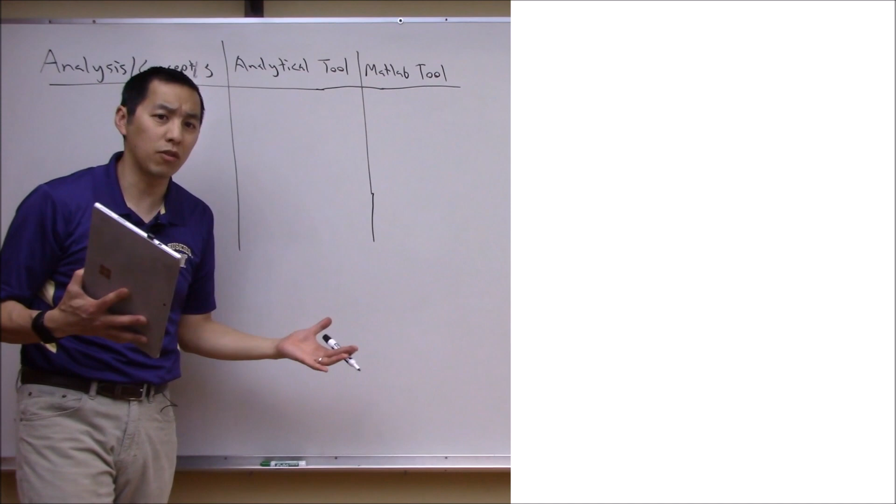So let's start off with maybe the easiest one. If you remember, we had a lot of discussion here on performance metrics like percent overshoot, settling time, rise time, etc. And we saw that the analytical tool that helps us understand these concepts is basically looking at things like the step response. We also saw that you could understand the percent overshoot and settling time for some systems, namely second order systems or second order dominant systems, by looking at regions of the complex plane. Basically, where do the poles land?

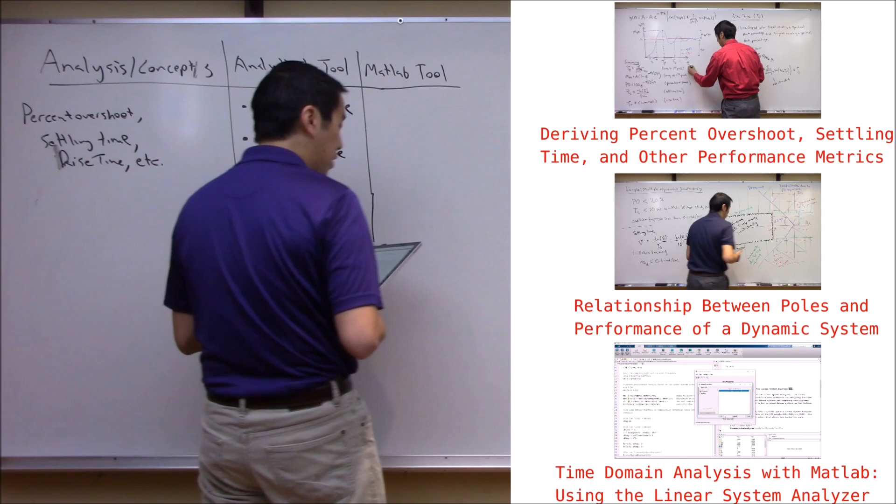And again, over here on the side are 3 of the YouTube videos that discuss these concepts and tools. And we saw that MATLAB actually provides different sets of tools to do this type of analysis. So there's things like the step function, the LSIM function. There's actually the linear system analyzer, which is another tool that allows us to do this. And many more here. I just wanted to list a few of these, okay?

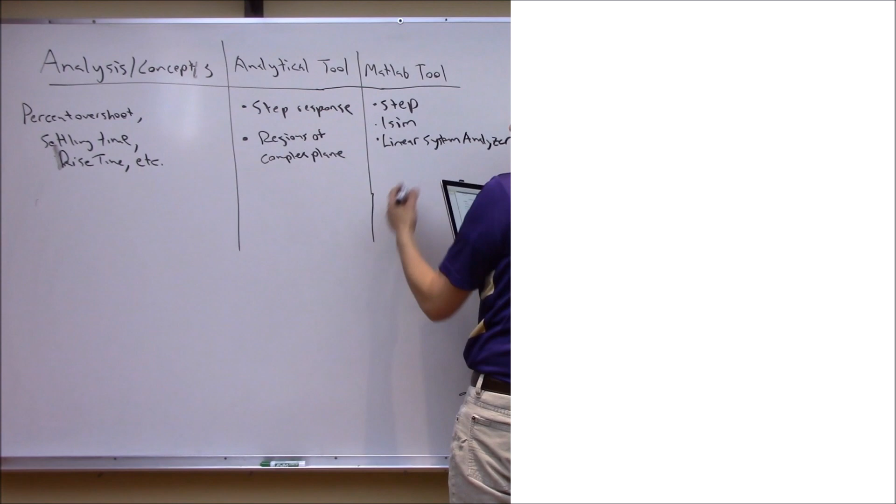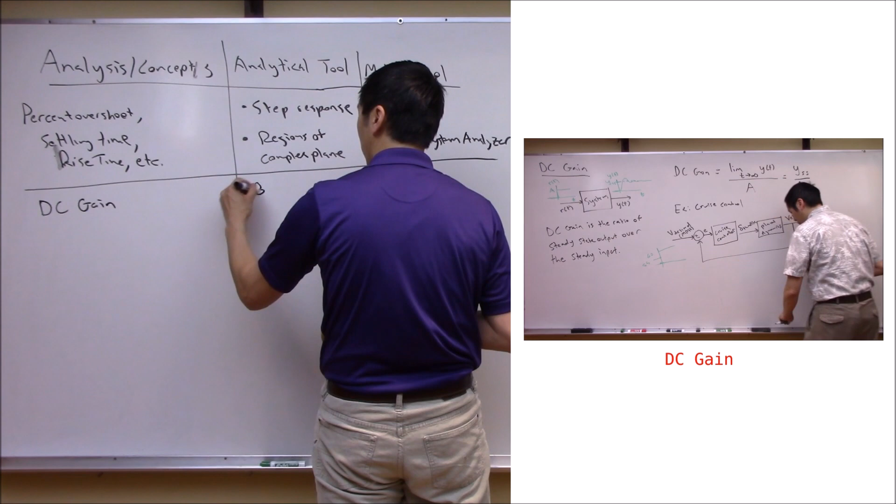So this was one concept that we saw was critical for designing control systems. What else did we see? We had a discussion on DC gain, right? And we saw that if you want to understand the DC gain of the system, what you're really thinking about is looking at the Bode plot, specifically at low frequencies. MATLAB has a nice tool for this. It has a Bode function which will allow us to do that.

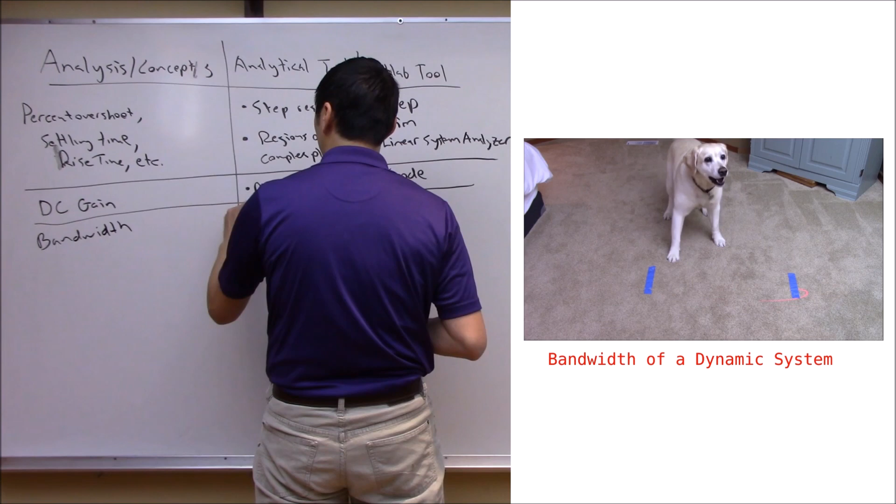Okay, what other types of concepts did we cover? We also looked at system bandwidth. And we saw that if you want to look at bandwidth, again, you're looking at a Bode plot, but you're looking at a Bode plot of the closed loop system. And again, the thing that's relevant here is the Bode function.

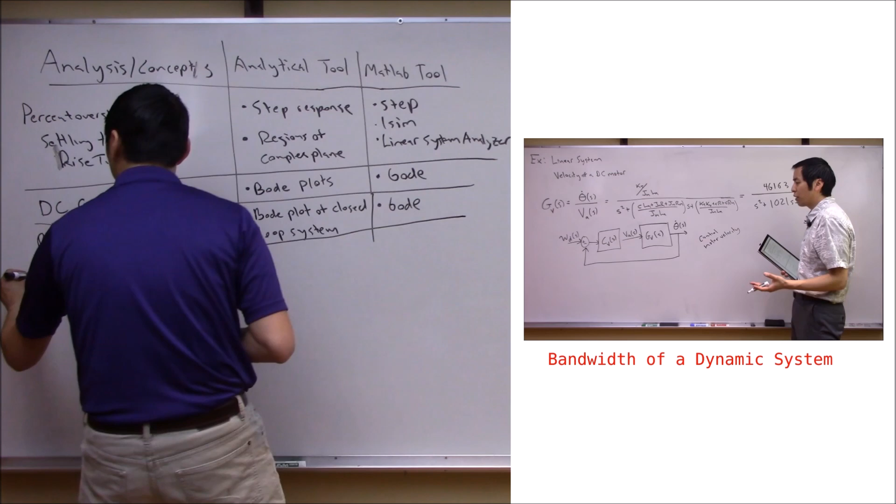While we're still talking about Bode plots, remember we also had a discussion on gain and phase margin. We saw that the idea was, again, you still look at a Bode plot, but now you're looking at a Bode plot of the loop transfer function, not the closed loop system, right? And again, you could use Bode, or MATLAB also has a margin tool for this. As I discuss all these, I'm going to flash up the relevant videos over here on the other side of the board. I'll leave URLs to all of these videos in the description of this video here.

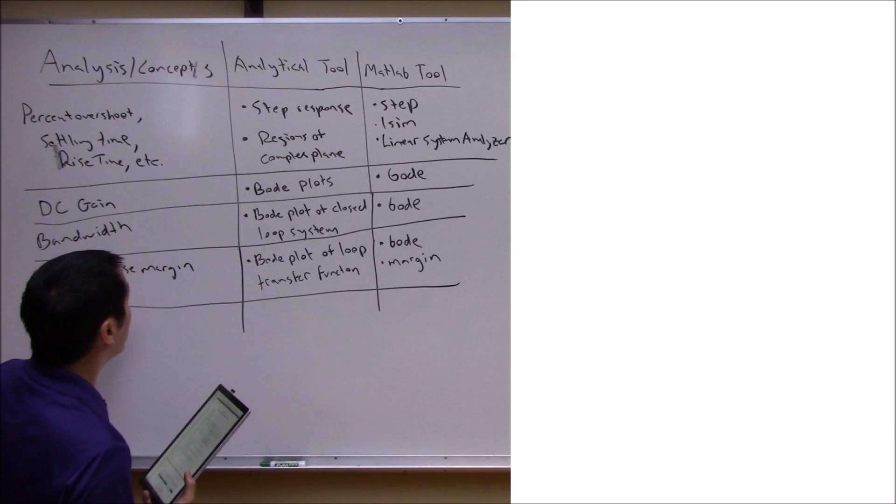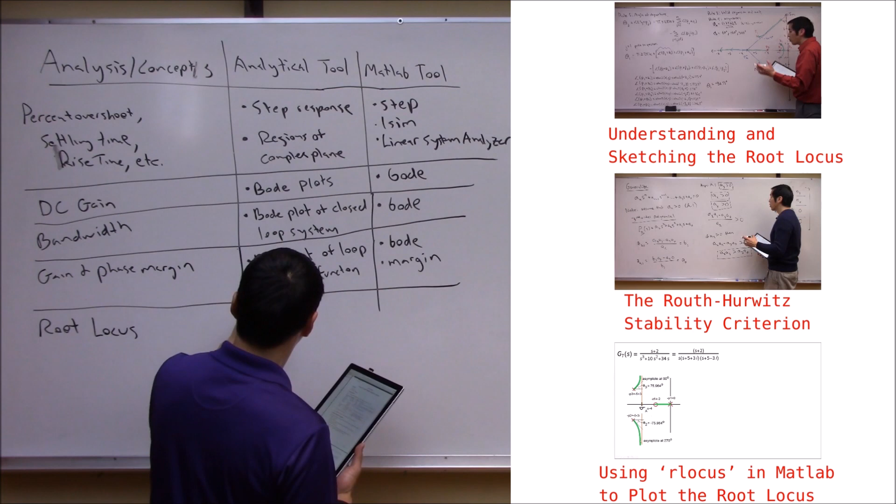What else did we talk about while we were designing controllers? Oh, how about root locus? That turned out to be a very critical concept. The ideas with root locus here were obviously you could plot the root locus - that's kind of self-explanatory. But there were other tools like Routh-Hurwitz, which also allowed us to help understand this concept a little better here. And again, MATLAB had tools for this, like rlocus.

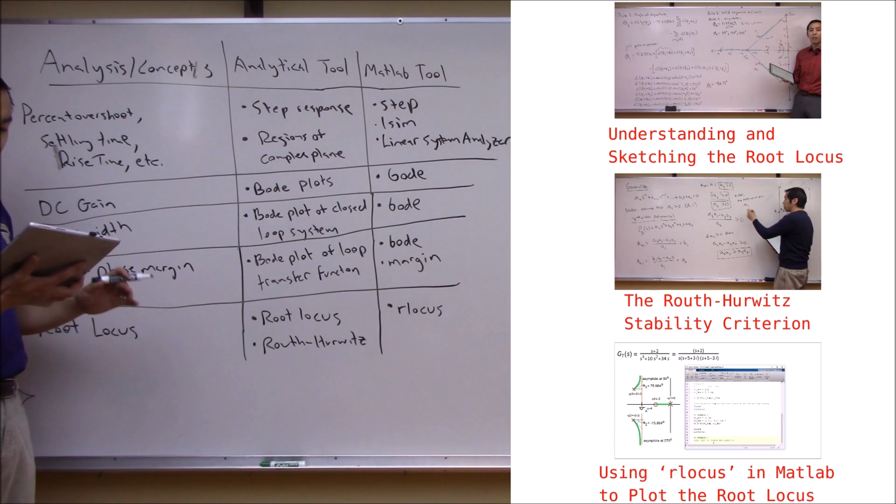So the reason I wanted to put up this list here is because we've had a lot of good discussions so far talking about all of these different topics, and I want to make sure that you've watched all these and understand these concepts because we're going to make use of them here, and it really helps understand that if you look at this, it's a pretty healthy list of topics, but they require a somewhat scattered set of tools to deal with, right?

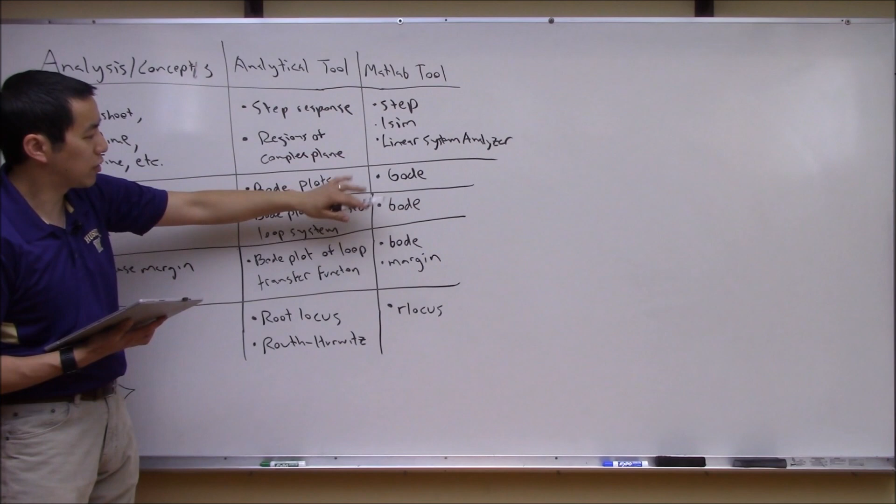You've got the linear system analyzer, you've got margin and Bode, and you have to do all these different types of analysis to see the whole picture, right? Because we saw all of these different concepts feed into designing a linear control system. So I bet you're thinking right now and wishing, gosh, wouldn't it be swell if there was just one tool that would allow me to do all of this analysis together at once?

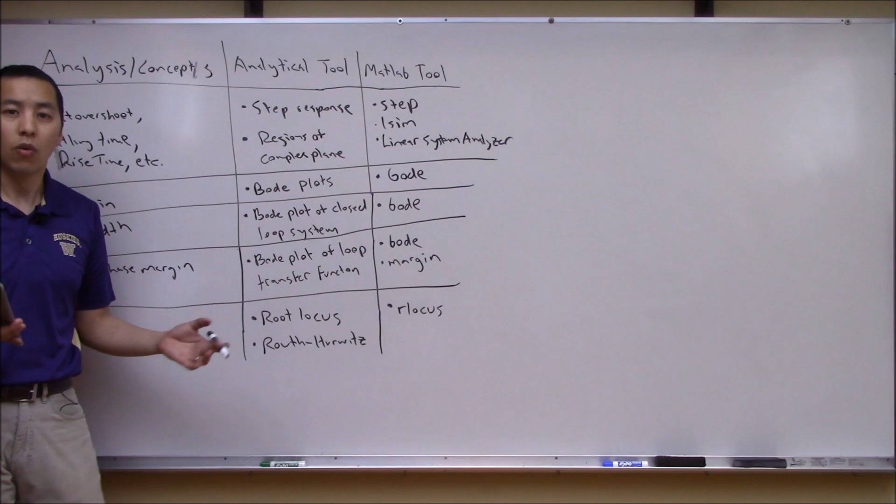Well, I hope you live in Agrabah with your pet monkey Abu, because today I'm going to be your genie and make all of your dreams come true.

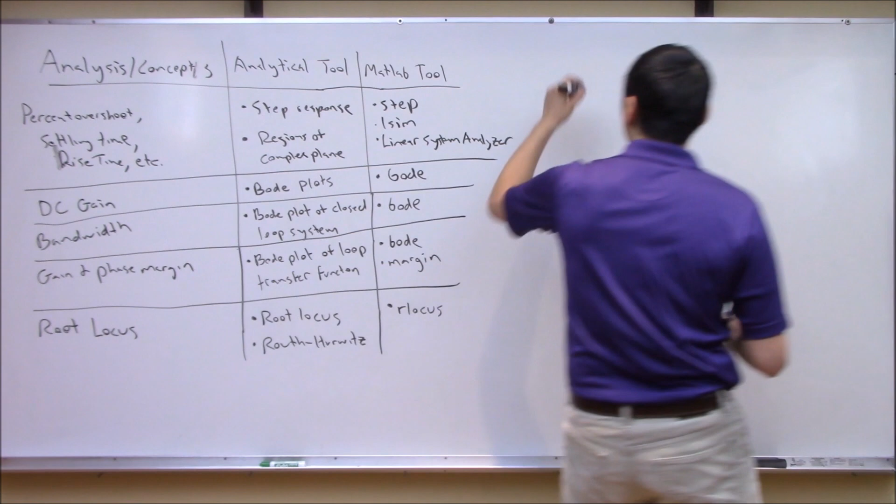We are going to introduce what's called the Control System Designer, which is a tool in MATLAB that's going to allow us to do all of these tasks and more. So it's going to allow us to do all kinds of things.

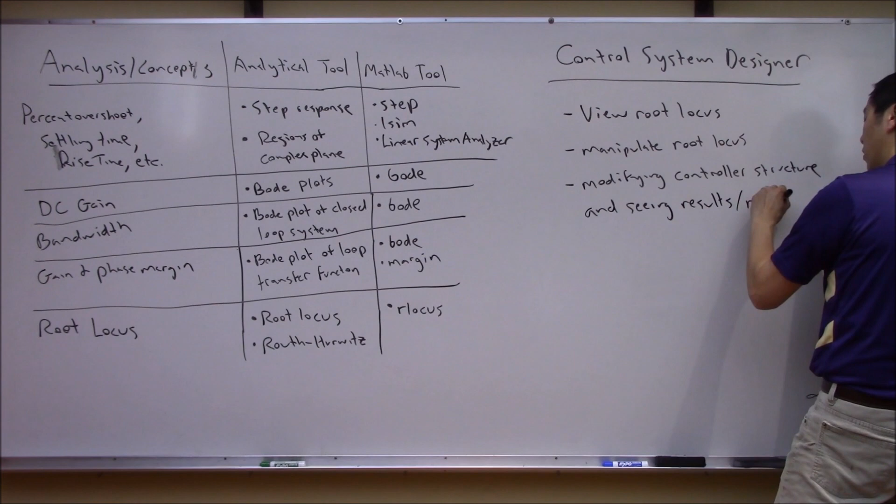For example, it's going to allow us to view the root locus. It's going to allow us to manipulate the root locus. It's going to allow us to think about modifying a controller structure in real time, and seeing the results and ramifications in real time.

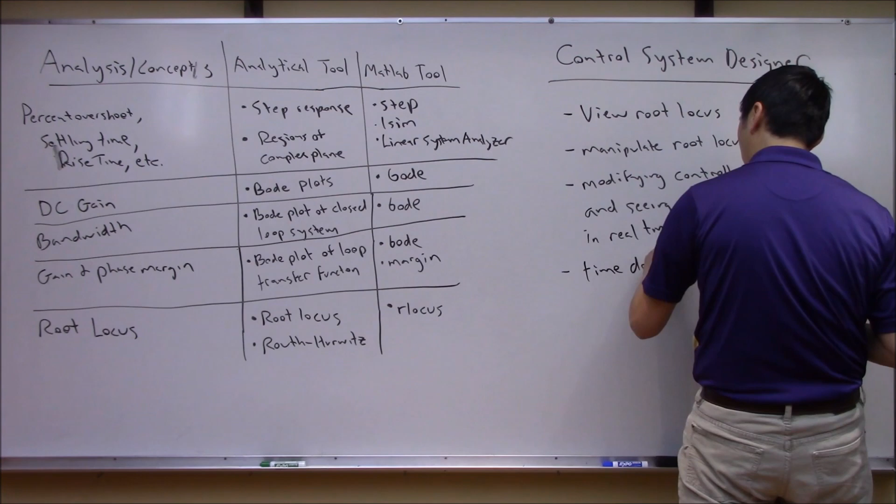It's going to allow us to look at the time domain response of the system. It's going to allow us to look at the frequency domain response of the system. So it's all of these things put together in one tool that, if we understand how to use this effectively, is going to really help our control system design workflows.

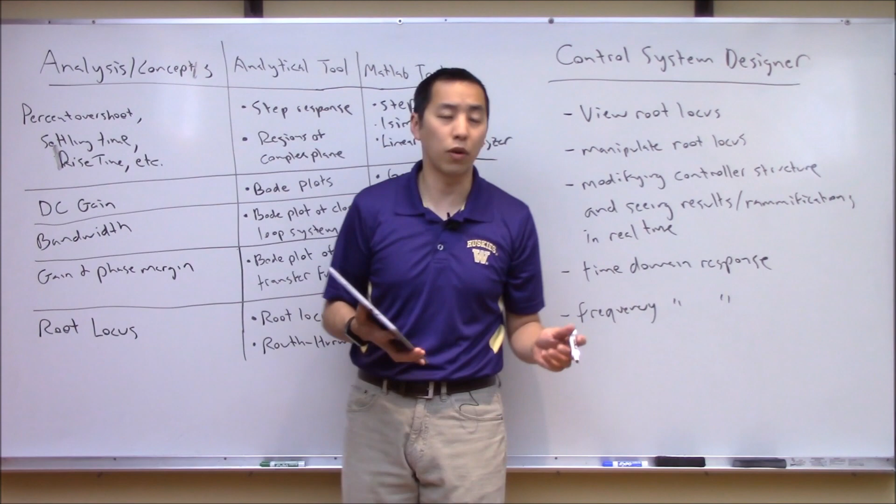So isn't this great? And you know what? You still have 2 wishes left. So if you'll chase them anywhere and you've got time to spare, then let me share this whole new world with you.

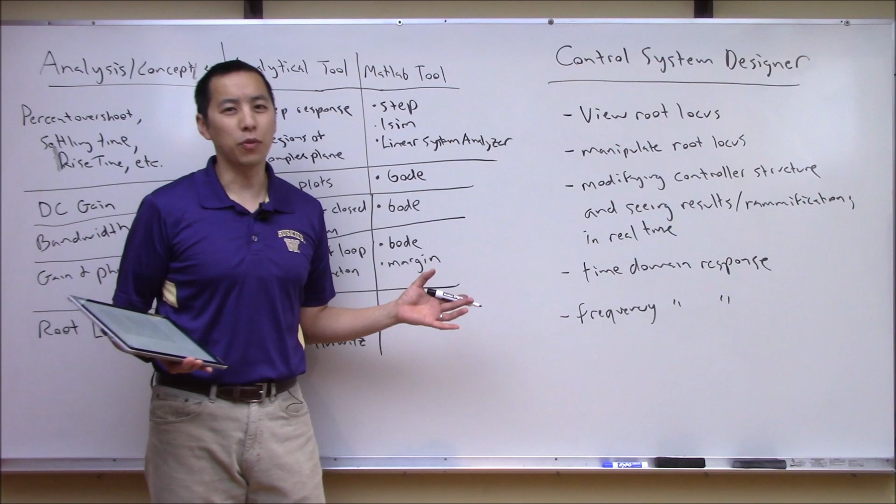Okay, so before we dive into MATLAB, I want to talk a little bit about just the workflow for using the Control System Designer. We're going to see that it's a little bit different, so it might behoove us to quickly discuss a relevant way to use this effectively.

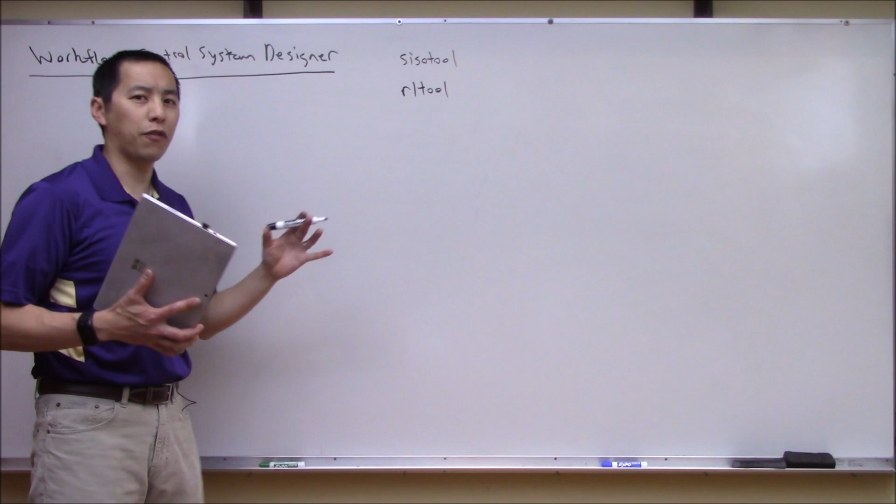Just as a quick note, the Control System Designer, you may have heard this by other monikers in the past. I think when I first learned about it, I learned about it as a SISO tool. So let's just make a quick note that it used to be called SISO. There was a thing called SISO tool. There was also a thing called RL tool. And I think these got renamed back in like MATLAB R2015A or something like that. And everything now that's newer is called the Control System Designer. So just FYI, if you hear people talking about SISO tool or RL tool, that's basically the same thing.

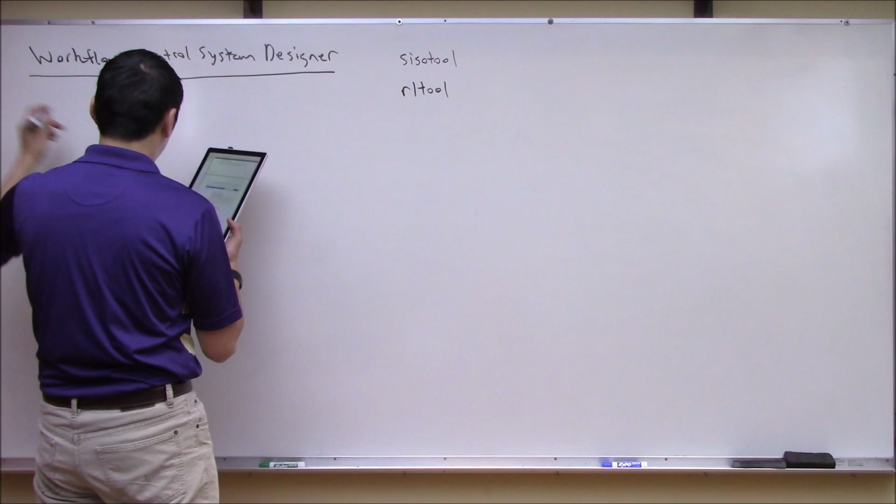So with that being said, the workflow for using the Control System Designer, I think of it as a 7-step process. So the first thing that you're going to do here is you're going to generate a dynamic model of your system.

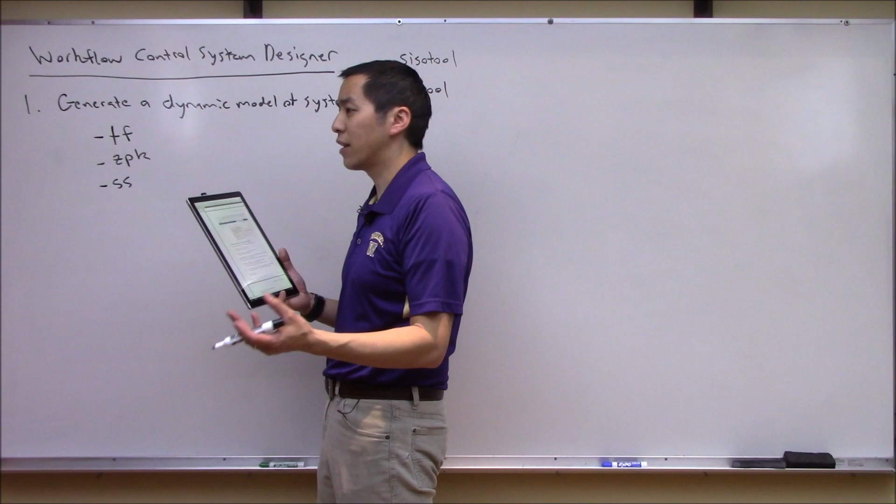Usually the plant. So things that are helpful is you could use things like the TF function, the ZPK function, etc., the state space function. All those things in MATLAB could help you generate basically a dynamic system model of your plant that we can then load into the Control System Designer.

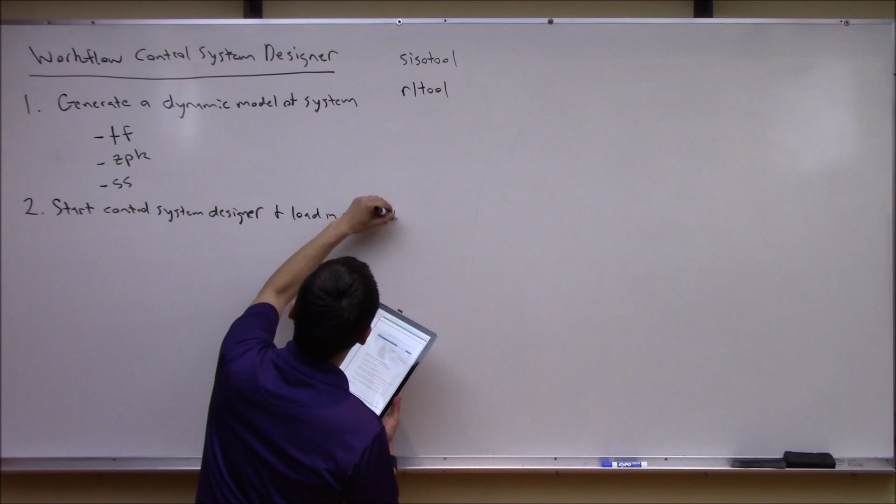So that's the second step. Step 2 here is go ahead and start the Control System Designer, and load in the plant model, the thing that we developed in step 1. The helpful command here is obviously Control System Designer - this should be a capital S and a capital D and a lowercase c. Okay, so that will get the system started. We'll look at another way to get it started as well, and we'll also look at how to load in the plant.

But once you have this all set up, what's really nice about the Control System Designer is you can add design requirements. Okay, so these are things like percent overshoot, pole locations, frequency domain response, time domain response - all those different requirements can be captured and codified in one spot.

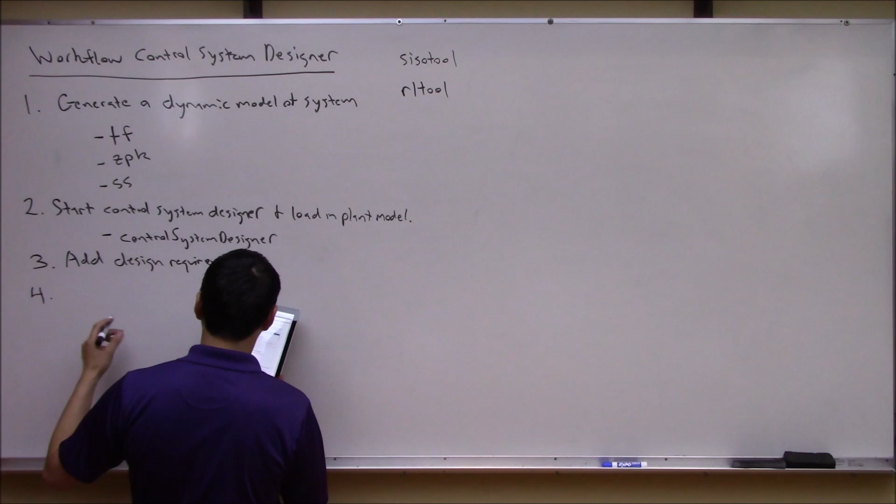Okay, the next few things - once you have that all set up, step 4 is now that you have your plant in there, you have your design requirements, you can basically go ahead and design your controller, or your compensator, however you want to look at it.

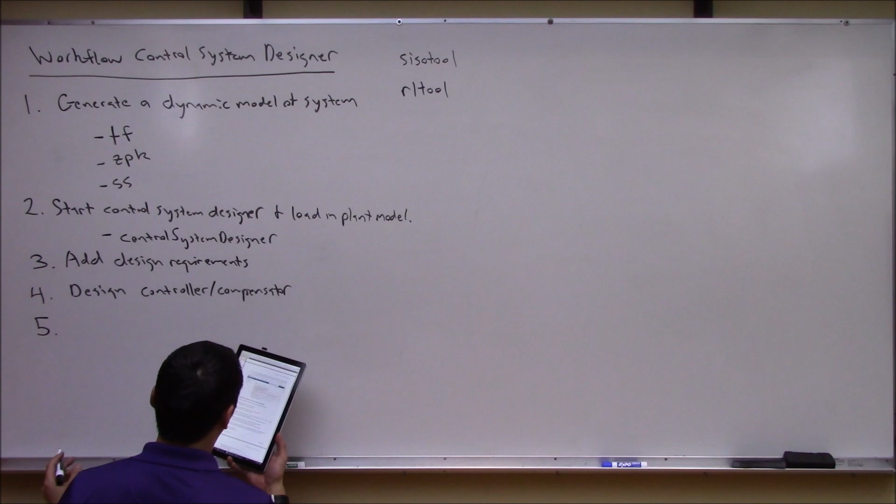Directly in the control system designer, we're going to take a look at how to do that. Once you're happy with your controller that you've designed, we're going to have to export that compensator back to the main MATLAB workspace. So step 5 is export your controller, or compensator, to the MATLAB workspace. We're going to see what this means in a little bit.

You might think everything is one giant workspace, but it's not really. Okay, then once you're done with that and you have it in the main MATLAB workspace, what I would do is save your controller and possibly save your session. Again, this will make a little bit more sense once we get into it. What is your session? So the relevant functions in MATLAB that are helpful here are, obviously, save.

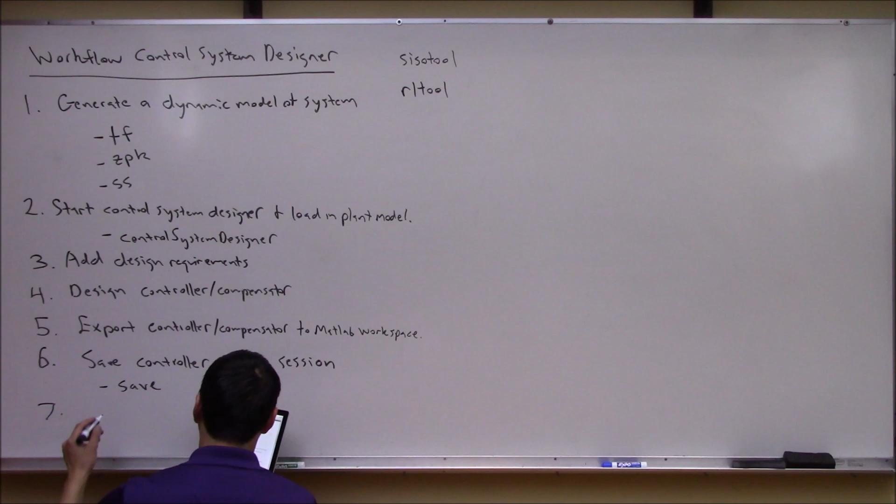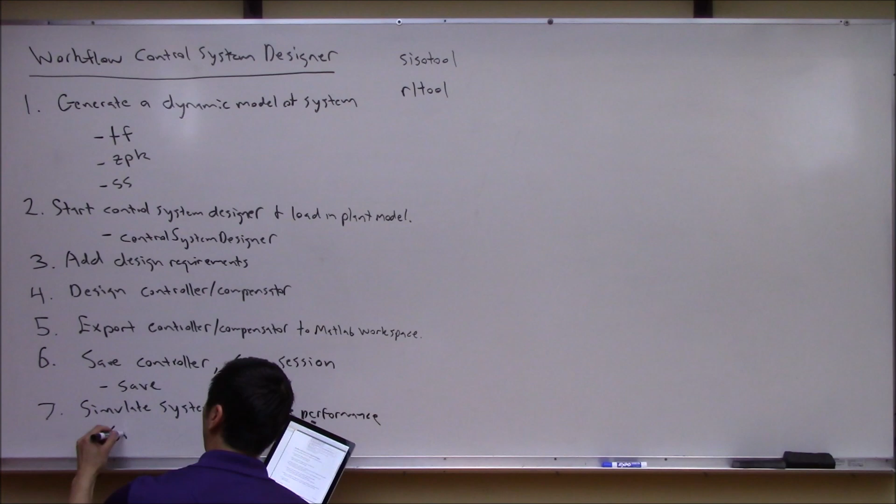And then the last thing that I would do, once you have all of this controller designed and saved, is go ahead and simulate my system to validate performance. In this case, I would basically think about building a Simulink model that represents this plant and this controller that I've designed, and make sure that it actually performs the way that you expect it to.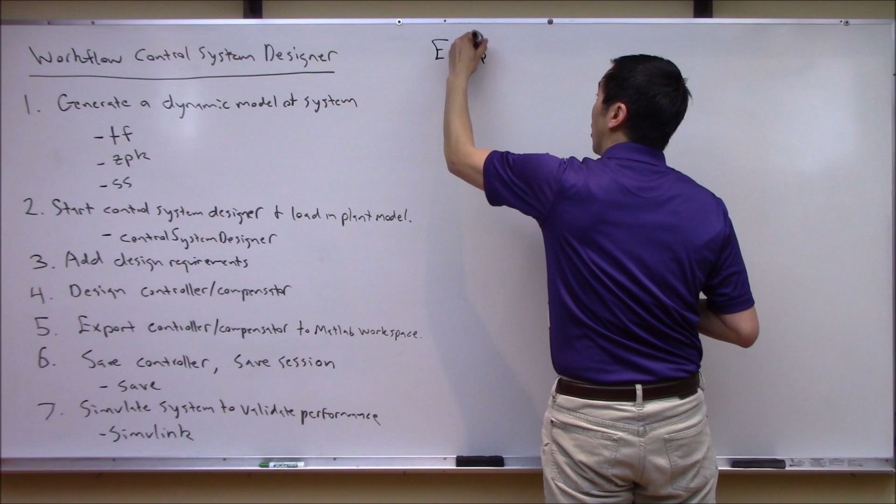Okay, so let's think about using an example. I always like concrete examples. So with this workflow in mind, let's think about an example that we can use and see if this control system designer will help us in this scenario.

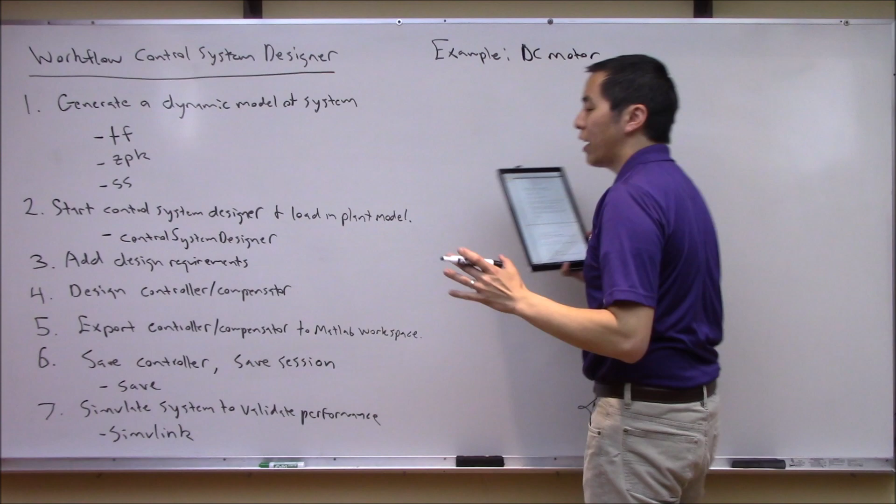So the scenario I want to look at here is our good old friend, the DC motor. If you haven't had a chance, we have a video talking about how to derive the transfer function, or a dynamic system model, for a DC motor. If you don't care about that and all you want to do is look at this as just some third order transfer function, that's great as well. But what I want to look at is how we can do DC motor position control.

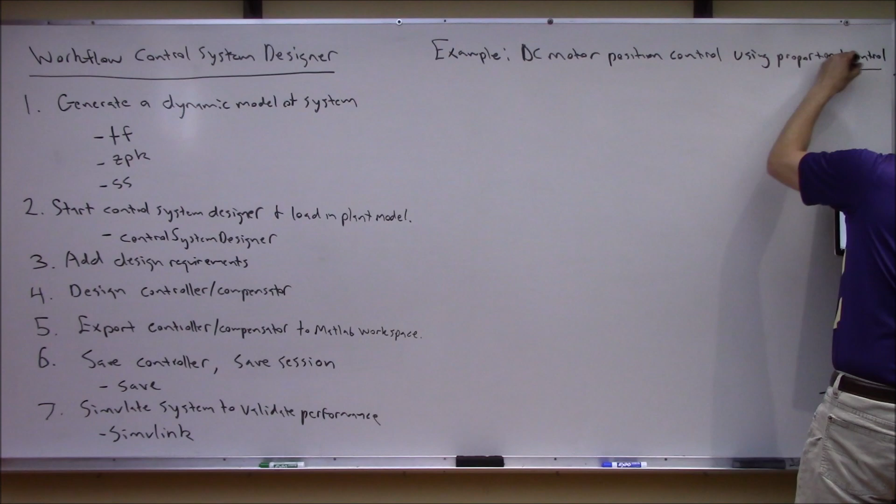And in this case, we are just going to be using proportional control. We're going to have videos later that look at more complicated control architectures, but let's keep it simple when we're just introducing this tool, okay?

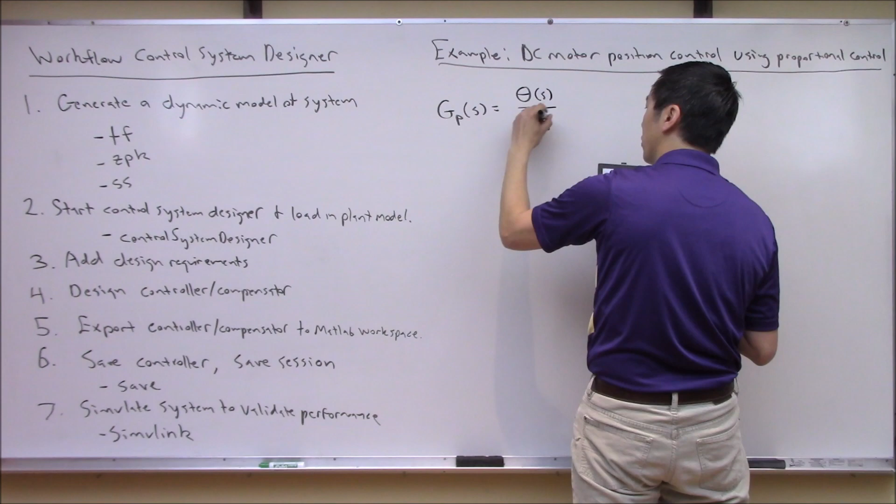So the way we want to think about this is, if you remember, the plant, let's call it GP of S, this is the motor position or the motor angle over the armature voltage, or voltage applied to the DC motor. We said that this transfer function, it's a bunch of constants, but at the end of the day when you plug in numbers, here's some transfer function. You could think about this as just a system that is dropped into your lap, right? Some other team in your job has gone ahead and said, here's the model of your plant, go ahead and build me a controller that will deal with it. So here's what it looks like: 46163 in the numerator, and in the denominator, S cubed plus 1021 S squared plus 4845 S. This is just your transfer function, okay?

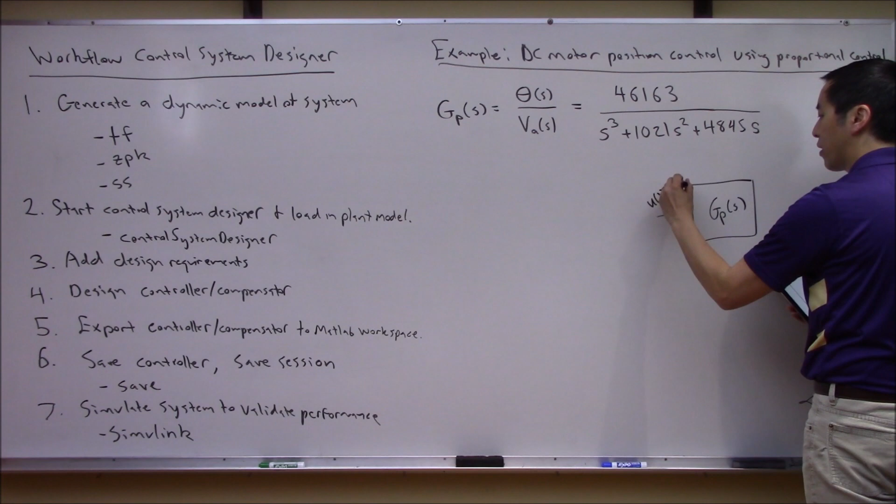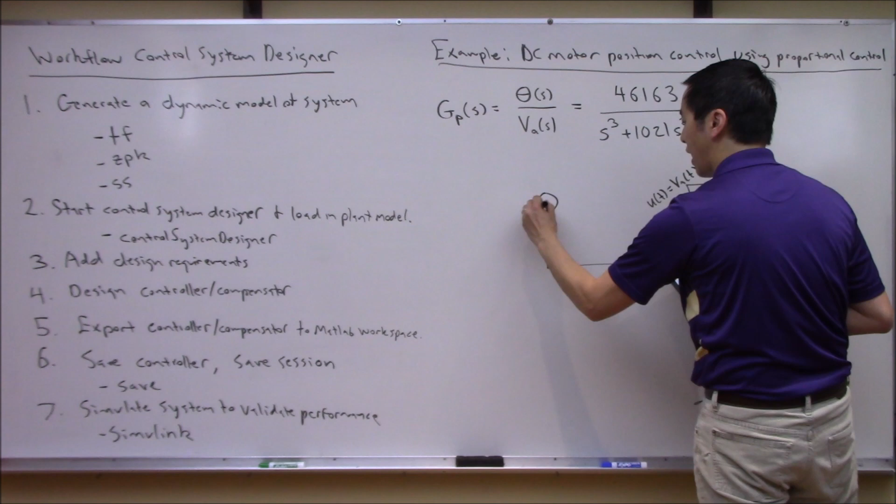So what we want to think about now is, okay, here's my system, GP of S, and you give it a control signal U, which is, in this case, the voltage to the motor, and it spits out the angle of the motor, of how far it's turned. What we want to think about now is using our specific classical control architecture, where all I want to do is design a controller C of S, where this C of S is just a gain K, a constant gain. We'll look at something more complicated a little bit later, but this is the game plan: find a value of K that will make this thing behave desirably. So we now need to think about what 'desirably' means.

Let's assume that maybe your manager drops some performance requirements onto your lap along with this system here. So let's talk about performance requirements.

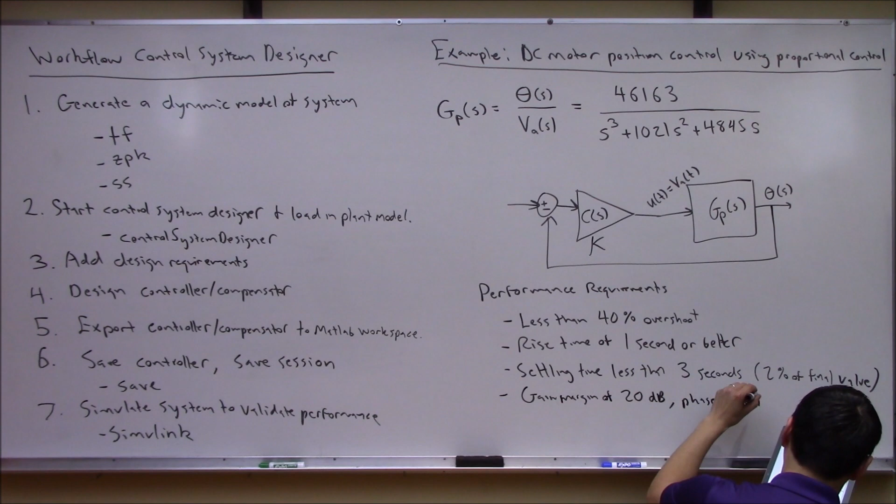Okay, so let's say they say you've got to have less than 40% overshoot, that's the maximum they'll tolerate. You have to have a rise time of 1 second or better. You need a settling time of less than 3 seconds, and this is to within 2% of final value—that's our band for how much we consider it to be settled. Okay, you need a gain margin of 20 dB or better, and a phase margin of 30 degrees or better.

And then finally, the system better have a bandwidth of greater than 5 radians per second.

At this point, hopefully it makes sense why I say you want to make sure you watch all of those previous videos, because if you did, all of these requirements should make sense to you. You should understand physically what the system has to do in order to meet all of these, or what it should behave like.

So our game plan now is to design a controller K that will simultaneously meet all of these requirements. What we saw earlier is, sure, you've got the tool set to do this right now by cobbling together different types of analysis, like loop transfer function Bode plots, closed loop transfer function Bode plots, root locus, pole locations, all of that kind of stuff. I'm sure you could do it, but I want to make the case that the control system designer is going to make this workflow a lot easier.

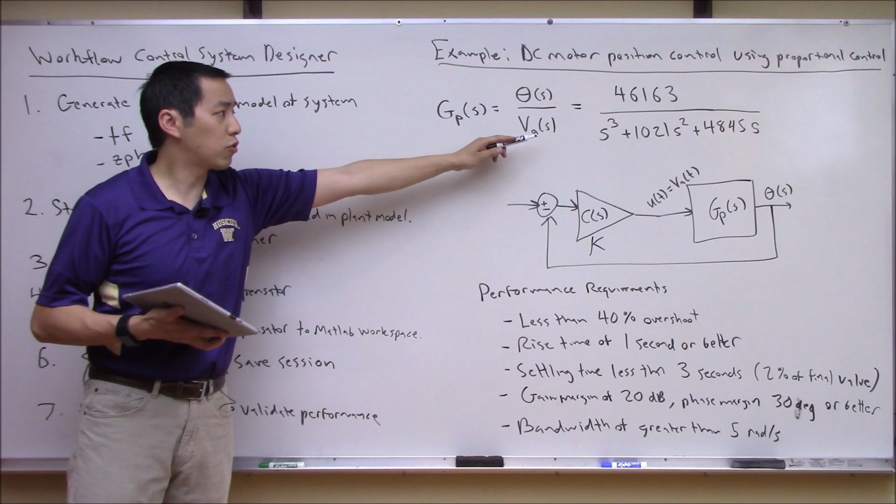So with that being said, let's jump over to MATLAB, get the control system designer fired up, build this transfer function, and walk through these 7 steps to see if we can use it to effectively and efficiently design that proportional controller K. So here were our 7 steps.

Let's start with step 1, which is generating a dynamic model of the plant. To do that, let's go over to MATLAB and start a new script.

I'm going to say we are using this to explore how to use the control system designer to create a proportional feedback

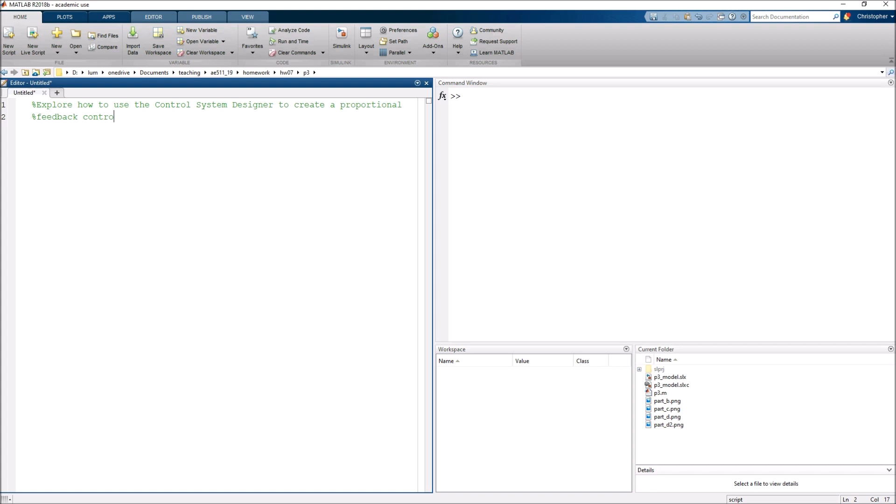controller. We'll start with our normal clear, CLC, close all, and maybe before we get started, let's go ahead and save this script.

So Control S to save, and I'm going to put this someplace. I have a folder already, and whatever you do, do not call this Control System Designer, because that's the name of a function we're going to use to start the designer. You can call it Control System Designer script or something like that if you really want to.

Now let's go ahead and start with step 1: generate plant model. We're going to do this the same way we did earlier.

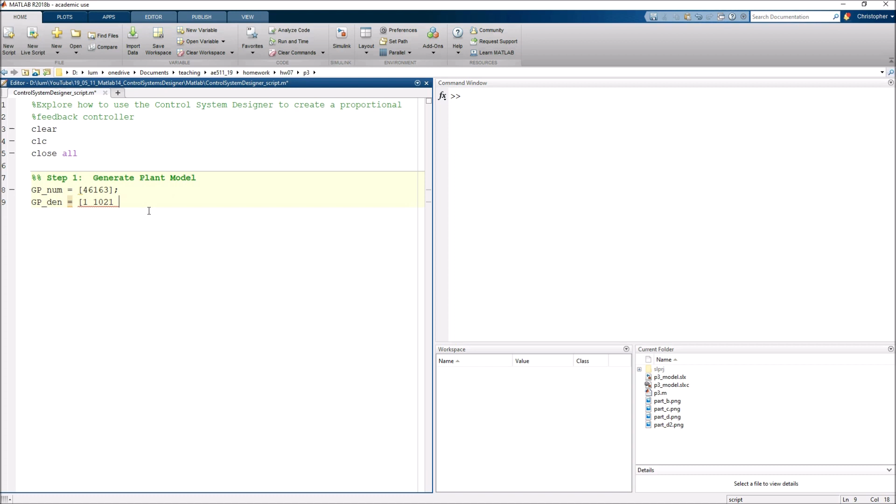We're just going to create a numerator coefficient vector for the numerator coefficients, and I should call that GP numerator. Then GP denominator is a vector of the coefficients of the denominator polynomial. So that was something like that.

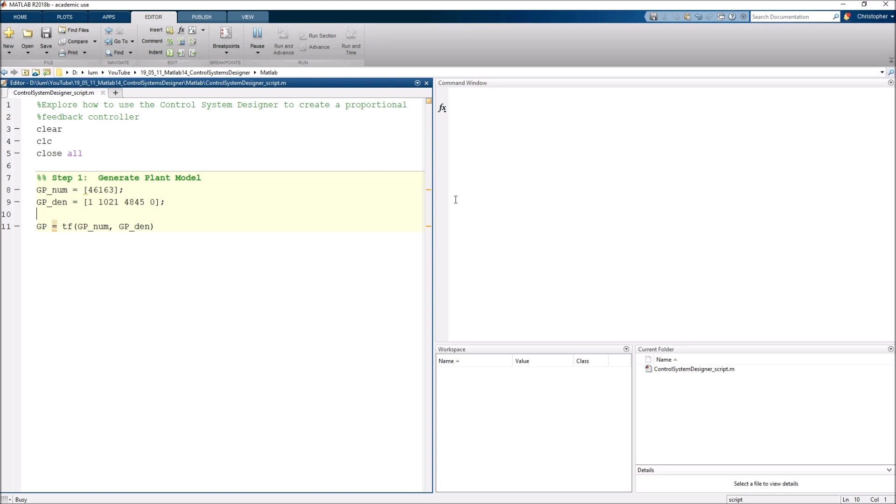And then the overall transfer function for our system is just going to be TF of num and den. So if we go ahead and run this, I'll change the folder to this current location, and here is our transfer function between the armature voltage and the position of the motor.

Okay, so next let's go on to step 2. Step 2 was we need to start the control system designer and then load in the plant model.

Hopping back to MATLAB, there's a couple of ways we can do this. Step 2, start the control system

designer. One of the ways you can do this is you come up here to the apps tab in your MATLAB window, and here are all these different apps. I'm going to hit this drop down, and I'm going to look for the control system design and analysis. Here's the one we're interested in, the control system designer. I can go ahead and star that because it's kind of helpful, so that will move it up to my favorites.

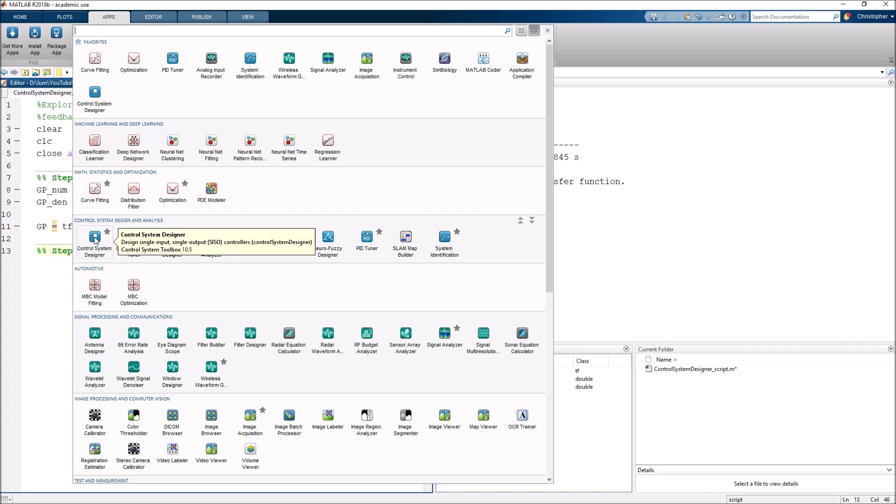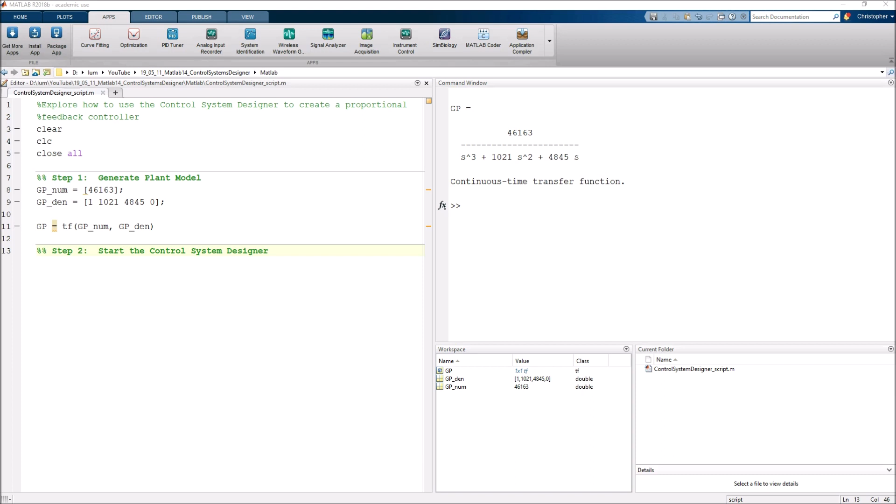But one way you can do this is you can just click on this icon, and what it will do is start what's called the Control System Designer. We'll give that a second to populate, and I'm going to show you a second way to get this as well. It pops up for me on a different window, so let me go ahead and drag it over here. It's still initializing, you're seeing it pop up a whole bunch of different plots. And here we go, this is the Control System Designer.

Let me close this real quick, and I'll look at a different way to open it and get to this exact same spot. So the other way you can do this, when you try to close this, you get this little save session notification. I'm going to hit no because I don't care about this for now. The other way you can do this is if you just go ahead and type help Control System Designer.

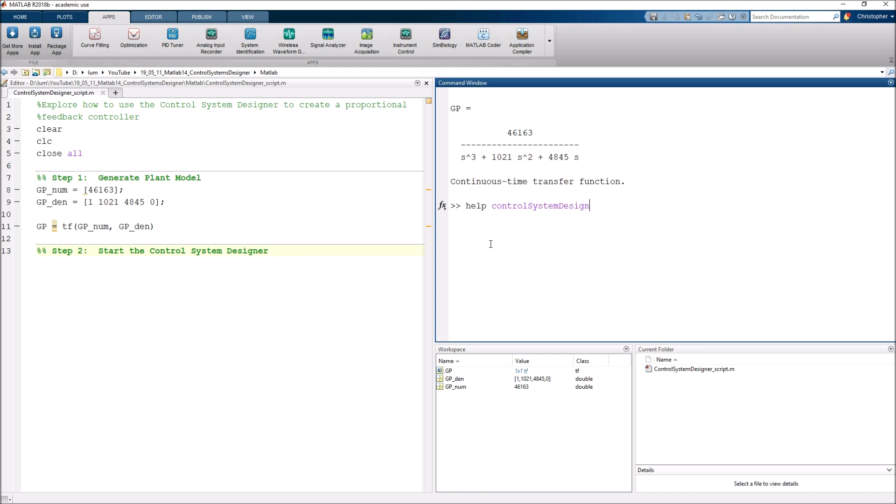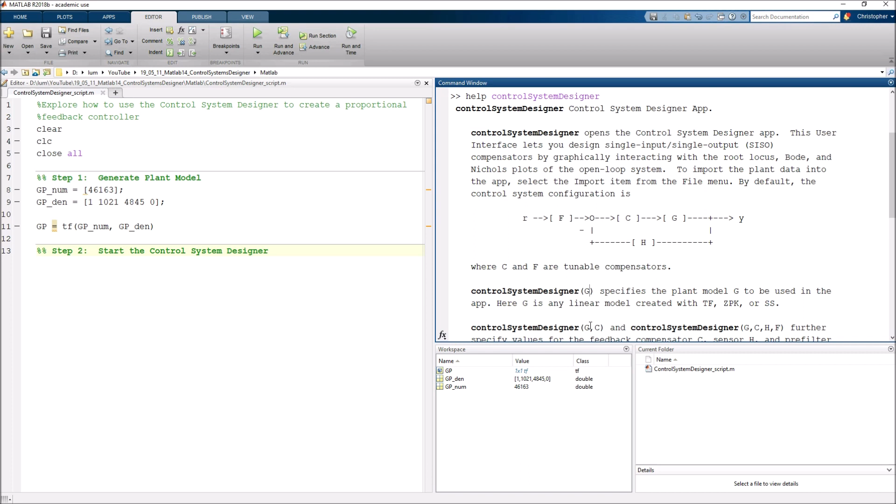You could call it like a function, and in fact you can call it like a function and pass in the plant model if you'd like. I'm not going to do that. Let's just go ahead and open the Control System Designer programmatically, without loading in the plant model, because I want to do this manually so we can get some experience.

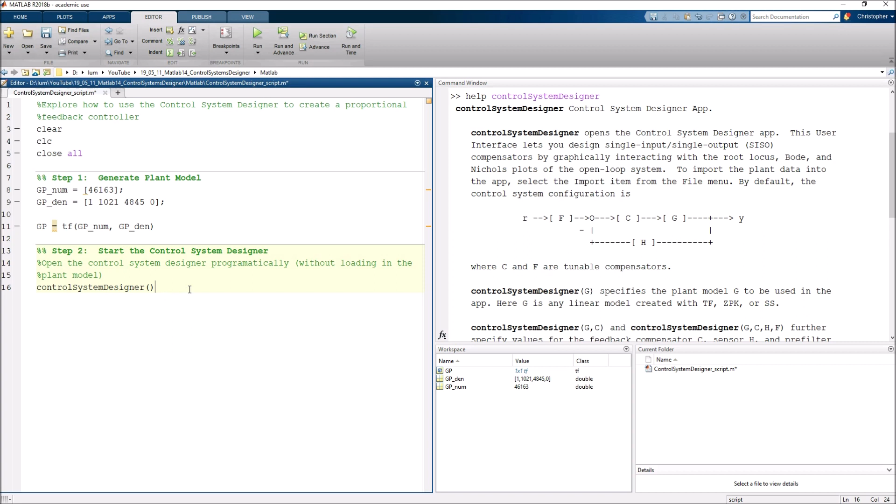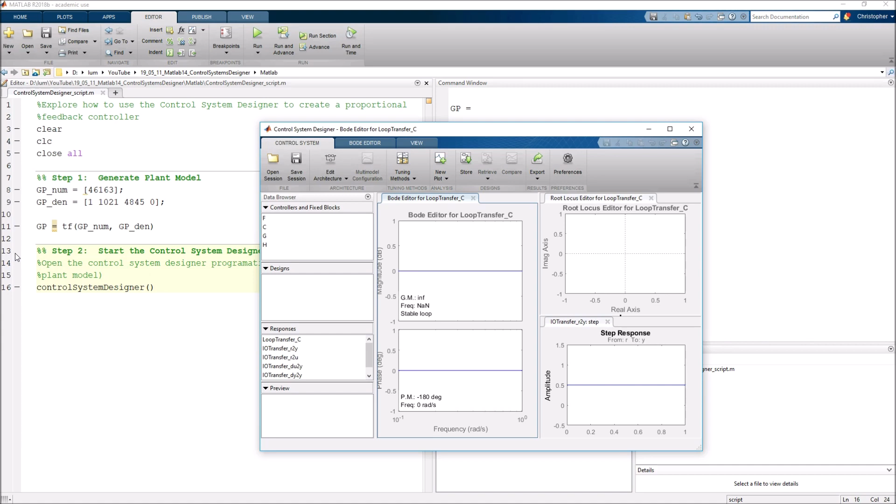So I'm going to say Control System Designer, like that. You can call it with empty parentheses if you want. Now if we run this, when we hit line 16, it's going to initialize the Control System Designer. So here it goes, it's pulling up. Let me go ahead and maximize this so we can get a better understanding of what's going on.

So the Control System Designer looks like a lot initially, and it really is. It has a lot of functions and features, but at its heart it's a root locus design tool that shows you the root locus of a given architecture of a system. It will also show you things like the step response of the system as well as frequency domain analysis. So the question that's probably on your head is, what system are we talking about here?

To answer that and finish up step number 2, I'm going to come up to this tab which says Control System, and you see there's a tab that says Edit Architecture. You can click on either this dropdown and select Edit Architecture, or you can just click on the upper half of the button.

Either way, when you click on that, if you give it a second, this window will pop up and it shows you all of the different architectures available for this system. It's quite robust—there's a lot of different architectures and block diagrams that you can analyze.

Let's go with this one here at the very top, because this is the classical system we're looking at. You have a plant G, and a potential to add a compensator or controller C. It also has a model allowing you to model sensor dynamics, denoted here as H, as well as a pre-filter, denoted as F. We're going to ignore F and H for our purposes and just focus on G and C.

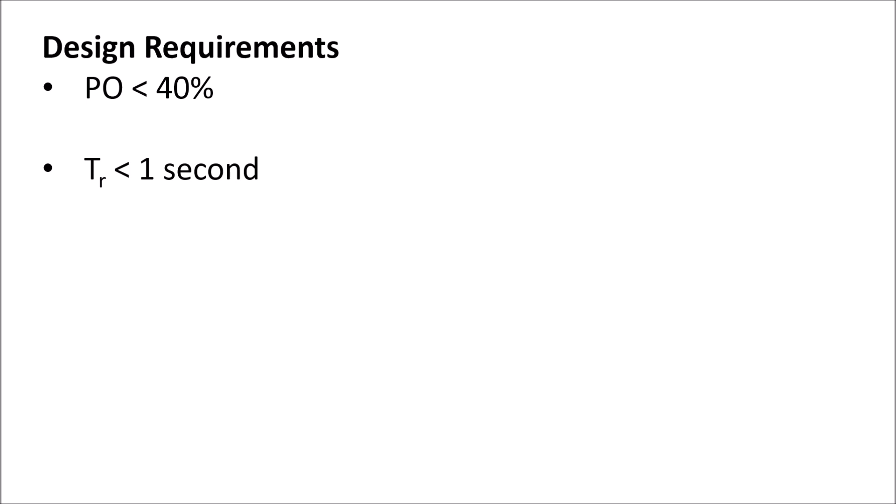All right, moving on to step number 3, that was where we were going to add design requirements. Now before we think about adding them, let's review what the design requirements were. If you remember, we said there had to be less than 40% overshoot, a rise time of less than 1 second, settling time to within 2% of 3 seconds or better.

We have more than 20 decibels of gain margin and 30 degrees of phase margin, and we wanted the system to have a bandwidth of greater than 5 radians per second.

Now these are the requirements. Maybe what we should think about is translating these into what types of plots or analysis we need to do or view so that we can verify that these requirements are met.

So the first 3, I think you'll all agree that if we look at the step response of the system, we should be able to understand all those things like percent overshoot, rise time, settling time, all that kind of good stuff. Also, we could look at trying to understand where the poles need to be in the complex plane, so we could look at the root locus of the system to try to tease out those percent overshoot and other performance metrics.

Notice there's an asterisk there, and I feel it's my duty to remind you that the root locus is actually only accurate and precise for second order systems or systems which are second order dominant. If you have higher order dynamics, the root locus, although we might be able to sketch areas of the complex plane where poles should fall, it's not going to be 100% foolproof.

And we'll look at an example of that actually in one of our future videos. So really the step response is the surefire way to make sure you satisfy the percent overshoot, rise time, and settling time. The root locus is a nice to have, and we'll look at it, but I just want to make sure we're all on the same page that it's maybe a starting point or suggestion, and really the step response is what you want to look at.

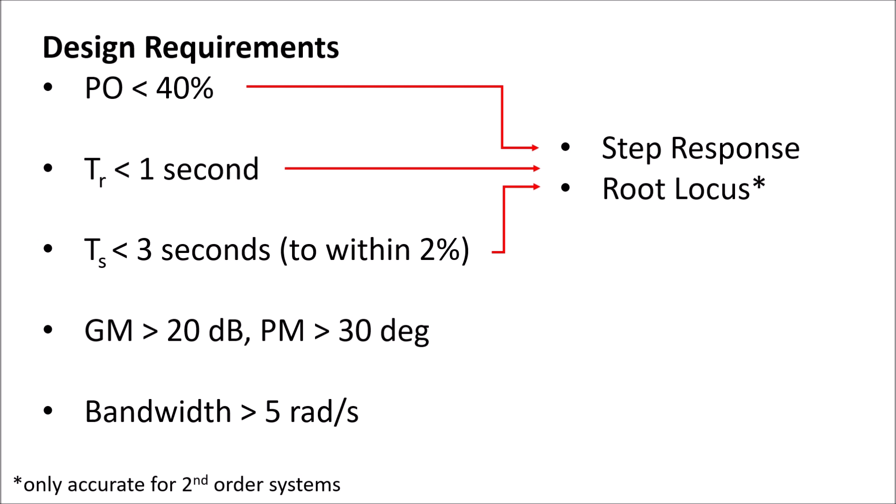Okay, let's move on to the gain margin and phase margin. How are we going to analyze that? Well, if you remember, what we need to do then is make a Bode plot of the loop transfer function or the loop gain, right? So in this case, it would just be the transfer function G times C.

For bandwidth, that's another story. Bandwidth, we actually want the Bode plot of the closed loop system from the reference input to the actual output. So these are all the different types of plots that we're going to need to make, and we're going to see that the control system designer can handle all of these.

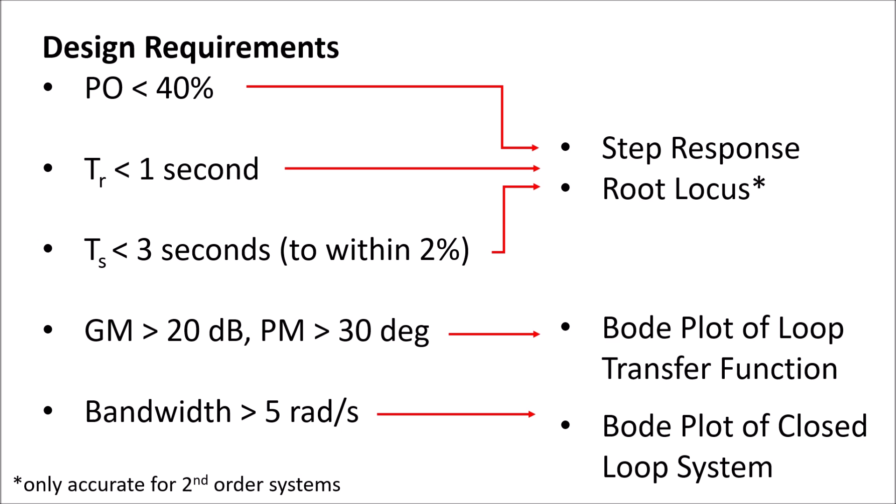So with that being said, let's go ahead and pop back over to the control system designer and think about adding these. So we see that by default, we've actually got almost everything we need. We've got the root locus up here in the upper right. We've got a step response, and if you look at this very closely, it says R2Y.

And again, if we come here to the architecture diagram, you'll see that this is indeed the closed loop step response from the reference input to the output, right? So down here is where we're going to want to be looking at performance metrics like percent overshoot and things like that. Finally, we also have a Bode plot of the loop transfer function.

So great, this plot will be very useful for understanding gain and phase margin. Now we need to add a couple of things. One of the plots missing from our list is the closed loop transfer function Bode plot from R to Y. So in order to get that, so we can get bandwidth, I'm going to come up to the control system tab.

You see this thing that says new plot? Let's click on new plot. There's a whole bunch of different plots you can put. Let's say I want a new Bode, and again we see our nice diagram, and now I want the Bode plot from R to Y, the entire closed loop Bode plot. So if I click on this drop down, I can pick the transfer function here, IO transfer, R to Y. That's exactly what I'm looking for.

If I hit plot, now what we're going to see is another Bode plot that shows up, which is now the closed loop Bode plot. This might be helpful if we grab and drag—I'm going to show you can actually pull this apart and rearrange as appropriate. So here we go, this looks awesome. Now I think we've got all of the plots we're looking for.

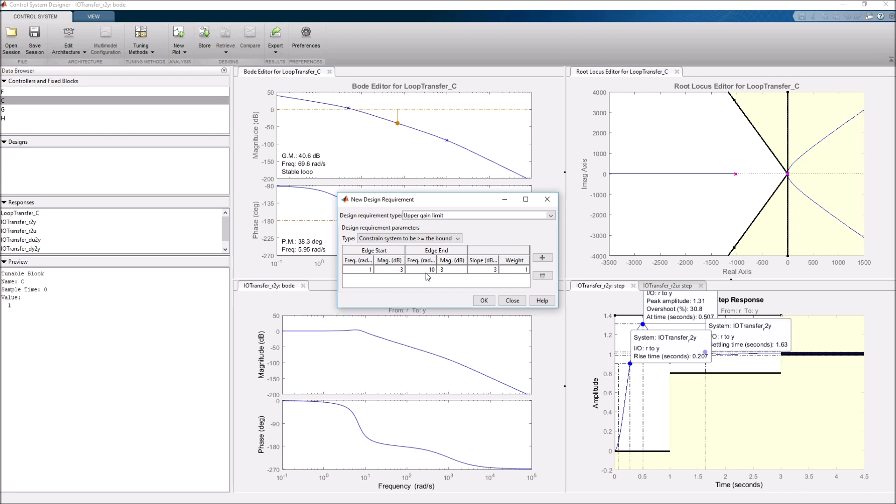So I need this thing to be -3 decibels, and I'm going to draw a line from -3 decibels, going from 1 radian per second up to 10 radians per second, which is perfect because the critical one I'm looking for is 5 radians per second. It's in this range. So if I hit OK, we get this other yellow region.

And if I zoom in, maybe it would be a little bit helpful because, again, with the bandwidth requirement, I'm just looking at 5 radians per second. So I'm going to zoom into here. Okay, so this looks fairly great, actually.

And interestingly, it looks like we're almost satisfying the design requirements right away. Let me look here at one more thing.

Remember we had the step response R to U? So here we go. This is the other one we can look at. So we could see that, yeah, it's only taking 1 volt to achieve this design.

So let's actually take a closer look at the root locus. This is the root locus for the closed loop system. And you remember, this is our DC motor, which has mechanical dynamics that are a little bit slower, nearer to crossing the imaginary axis, and electrical dynamics which happen very, very fast here. So you can see here there's this pole out at minus 1,000. So most of the action is happening near the origin.

So I want to zoom in on that. If you click on the root locus, you see as soon as you do that, you get this extra tab up here which says root locus editor. If I click here, there's all these tools to help me manipulate the root locus. So I'm going to click on the zoom tool, and let's zoom in to where all the action is happening. So here we go, this looks a little bit more interesting, right?

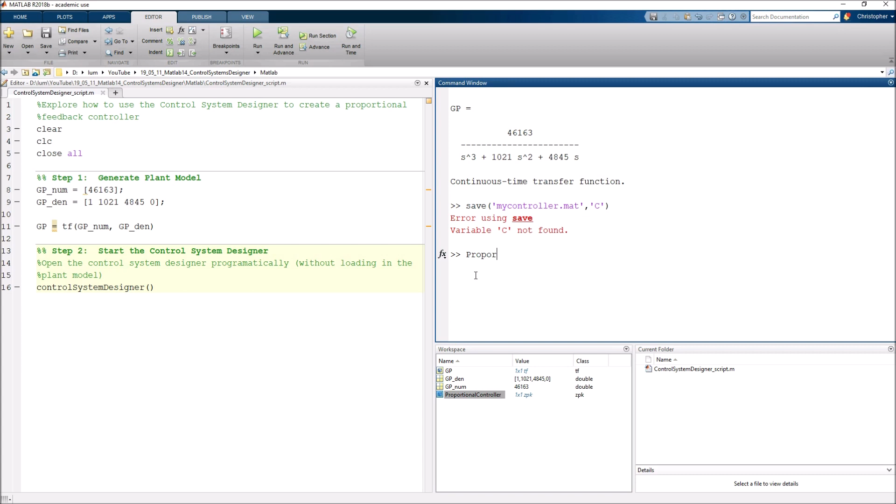And if I now hit export and come back to MATLAB, you see that it has made this thing called proportional controller. So if I look at this, here it is. I've got this now exported to the MATLAB workspace. This is the controller that I want to use.

Okay, so now let's go ahead and move on to step 6. Now that we've exported the controller, we can go ahead and save it, both the controller and the session. This is the workflow I usually like to follow.

So let's come over to MATLAB, and now we can go ahead and save, whoops, here, and I guess we didn't call it C, we called it proportional controller. So it's really this simple. All I'm going to do is just save this ZPK object into a file. And when I do that, here it is. Here's mycontroller.mat. So I've saved the variable.

But all of this work that we did back in the Control System Designer, moving all the poles around, setting up all these plots, this was a fair bit of work. You might want to save that as well. So you can come up here and click on Save Session, and what that will end up doing is it will create a mat file, which should hopefully be loadable in the future.

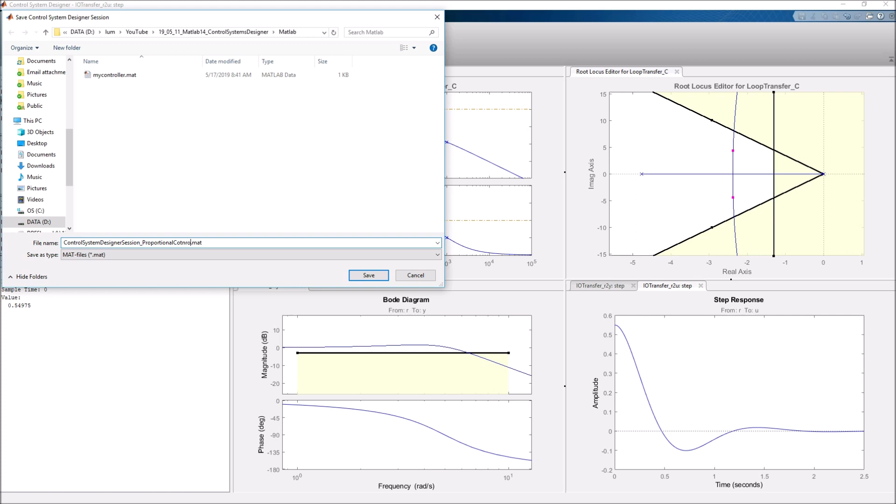So let me go ahead and call this Control System Designer Session, maybe let's call this underscore proportional controller dot mat, and it will just save that in the current directory.

So let me just illustrate that for you. Where is my current directory? Here it is. Here's the controller that had only the variable C, and here is our mat file, which contains the Control System Designer session. So a word of warning with this, you might think this saves everything perfectly, but let me go ahead and show you what happens.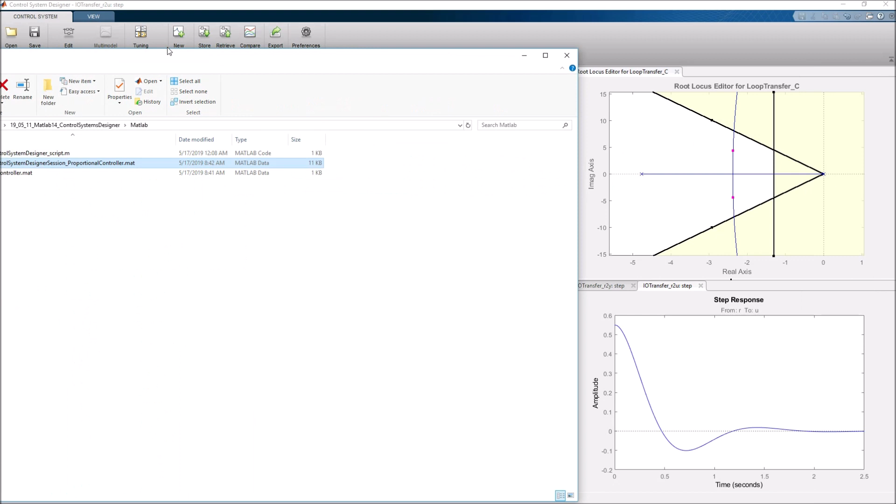So let's pretend that we're done for the day. Let's close the Control System Designer, and we want to come back and boot this back up again. So let me go ahead and just clear everything. Maybe that's a good way to do this. Let's start from scratch. So everything is gone.

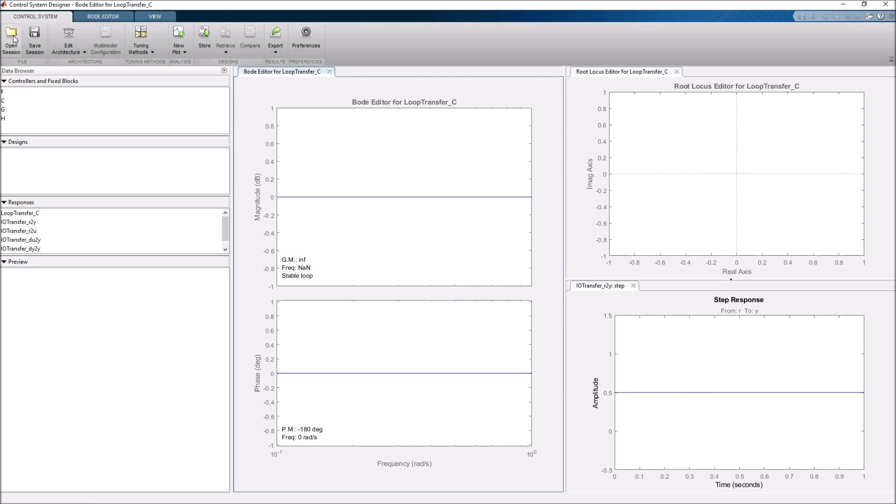I can go ahead and start my Control System Designer like we did earlier, and bring it up, and here we go. It's loading up our blank Control System Designer. So let's go ahead and open a session that we just saved. Here it is. Here's the session we just saved, and if I open this up, give it a second here to load, it will get most of the items correct.

It will load in all the objects, but notice here that it really didn't save my layout too well, so you may have to play around with this a little bit to get this exactly back to where you want it to. So for example, I think we had the Bode plot of the loop transfer function was over here.

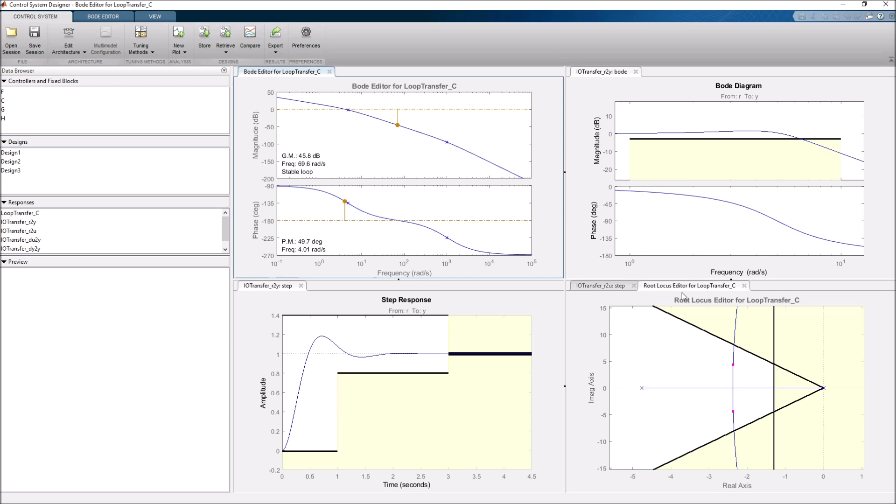I think we had, actually, yeah, this Bode plot was down here. We had this over here. Oh, come on. And then we had our root locus on top. Okay, now we're getting a little bit closer to where we were. But again, notice you might have to go ahead and add these characteristics back. So it's not a completely foolproof method, but look, it did save a lot of the items.

It definitely saved the plant, it saved the controller, and it saved all of our other designs that we had built earlier in case we wanted to go back to one of these other systems. Okay, so this is looking great. I think we've done step 6.

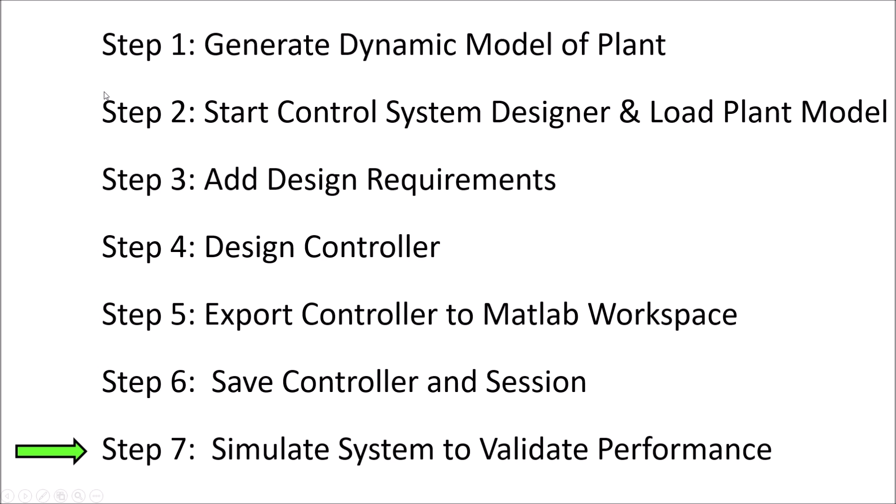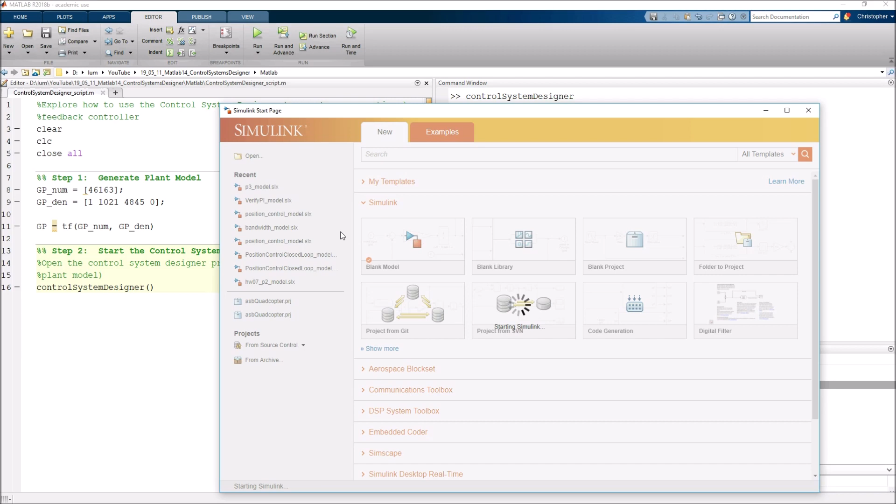Okay, so the last step in our workflow is step 7, where we want to simulate this system to validate performance. So one option is come over to MATLAB and just start up Simulink and build yourself a blank model that represents this system with the controller and all of the stuff that we had earlier. So I will get a transfer function here and make this GP of S.

And then I guess we could come in here and call this GP num and GP den, and then we could go get another gain which represented the controller, which was 0.55, I think was what we had, and you could start hooking this up and building the system, and hitting simulate to make sure that you got the performance that you designed in the Control System Designer.

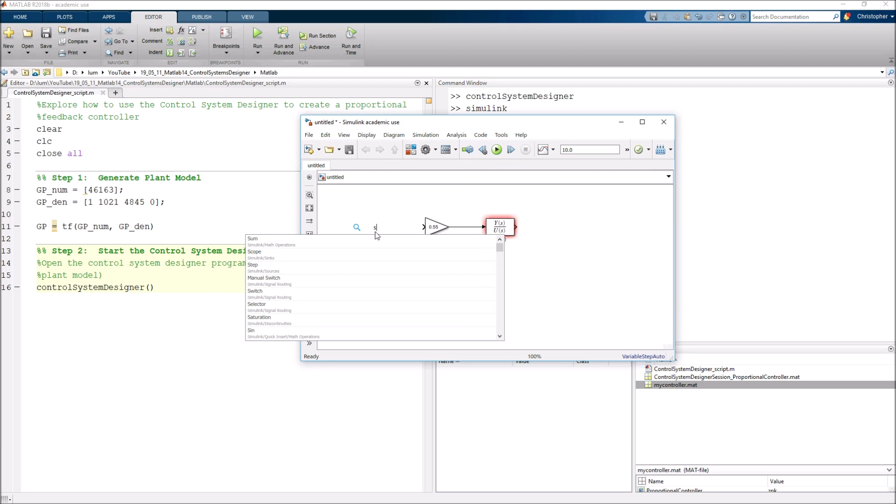And this is a perfectly viable way to go, right? You could go ahead and make all of these blocks yourself and hook everything up. But as the systems get more complicated and you want to rapidly iterate, I think you can see why this is a little bit cumbersome, having to build the Simulink model yourself.

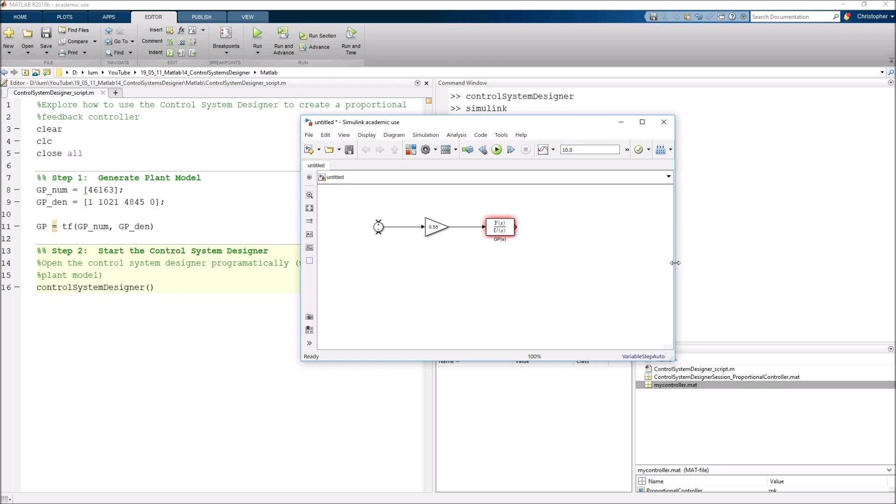So what's super awesome is, let's go back to the control system designer. And this is the system. Oh wait, sorry, actually no, this is not the system we want. We better go back and retrieve design number 3. This was the system we wanted. Now, let me triple check. Yeah, with a K of 0.55.

Let me show you a really awesome button that the control system designer has. So if we come here to the export tab, there's this other thing that says create Simulink model. So instead of me grabbing and dragging blocks by myself, if I click on this, it knows what type of architecture we're using. It knows all of the blocks, it knows the architecture. So if I click on this, I get this little warning here.

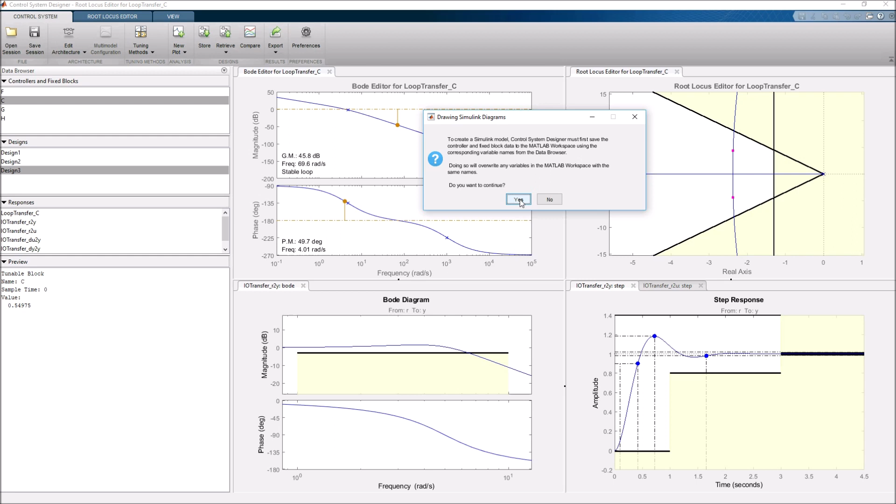Maybe we should read this quickly. What it says is it's going to create this Simulink model, and it's going to export things like F, C, G, H to the MATLAB workspace. So you better make sure you don't have any other variables called F, C, G, or H, because it's going to overwrite them. I know I don't, so I'm just going to go ahead and hit continue and yes.

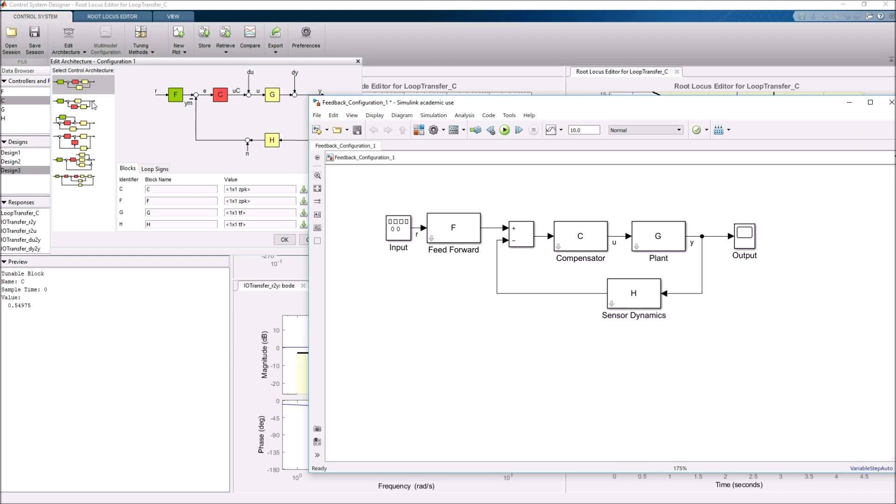And if you give this a second, what it's going to do is basically auto-generate. Here it is, it popped up on another window. I'll drag it over here. Look at this, this is amazing, right? It automatically generated the appropriate architecture. Let me just compare this. Maybe I'll pull this up on one side and pull the Simulink model up on the other side. Notice it did almost perfect.

I want to say almost perfect, because the one thing you might want to notice here, and I feel like I should call out, is that the input block, if you double click on this, for some reason it decides to use a sine wave as an input. I like to look at the step response, so I'm going to make a very minor modification to this auto-generated system and input a step instead.

So I'm going to get a step function, and I'm going to make it go at about 2 seconds. Let's set the unit step value, and put in a manual switch just so I can quickly change between these two different inputs, and connect this up. Here we go. Flip the switch to down, and let's also put an additional scope on the control signal, because that's always something interesting to notice, to see how much control authority you're actually exerting.

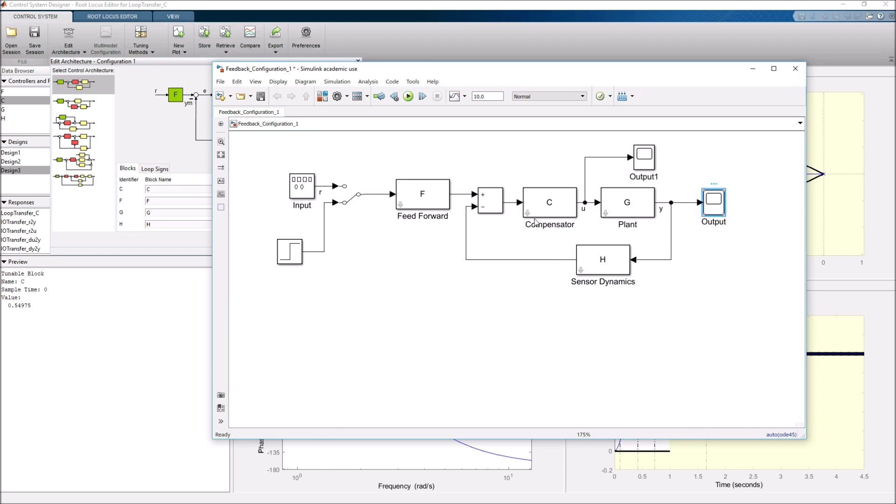So if I go ahead and hit run, this Simulink model ran, and I can look at the output. Let me pull this up. Here we go. And I can look at the control authority. Here we go, here are the two. And these look exactly like what was predicted in the control system designer.

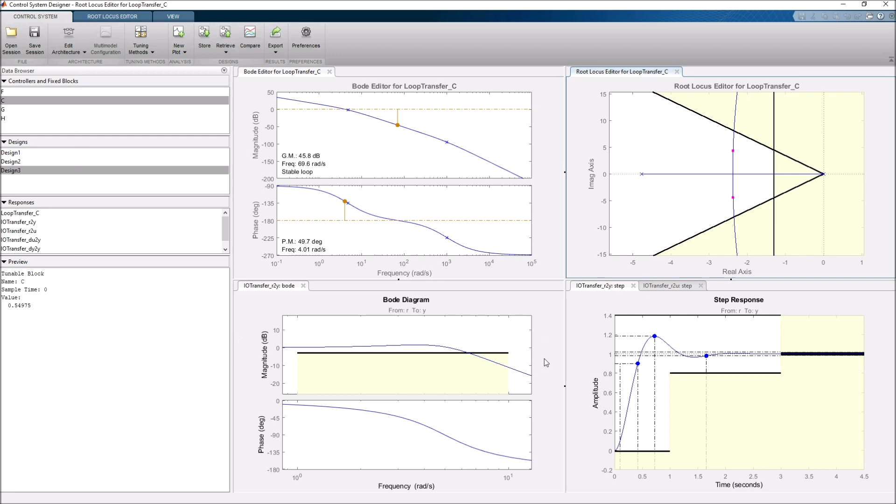Let me see if we can pull all these up side by side. Let me pull this, come on. There we go. Okay, so we got the step response of the actual output and the control authority. So let's line these two up, and look at this. They look perfect, right? Great.

So with that, I hope you've seen how the Control System Designer is a really powerful tool to help us design and iterate on linear controllers. Of course, in this case, we used it to synthesize a very simple controller, just a proportional controller, but this sets the stage, and I wanted to show how this tool can be used, because in our future video, we're actually going to be talking about how to design PI or PID controllers using this workflow.